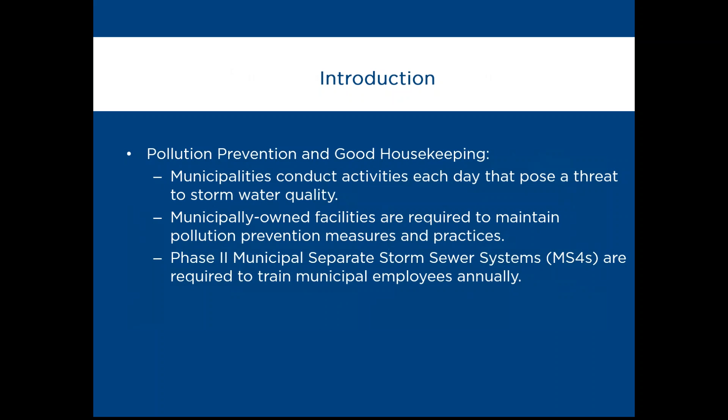Another reason is that municipally owned facilities are required by the MS4 program to maintain pollution prevention measures and practices. And lastly, as we've already mentioned, MS4s are required to train municipal employees on an annual basis to minimize adverse impacts to stormwater quality. So our first item here is salt storage and application.

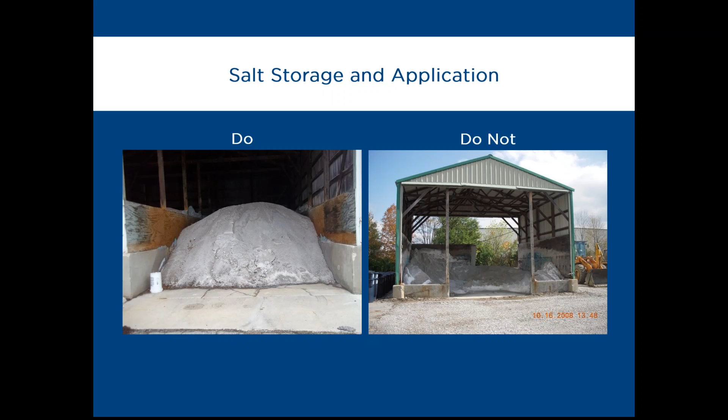Some proper management strategies for salt storage and application. Do store de-icing salt stockpiles in a covered structure. Push de-icing salt back into designated areas, as this prevents exposure to stormwater. And remember that salt should only be applied as needed to achieve the desired de-icing effect.

So if we take a look at this example here, we can see that the salt is located in a covered structure, that the salt is pushed back away from any openings, and that the salt is not exposed to stormwater. So this is a really good example of salt storage and application.

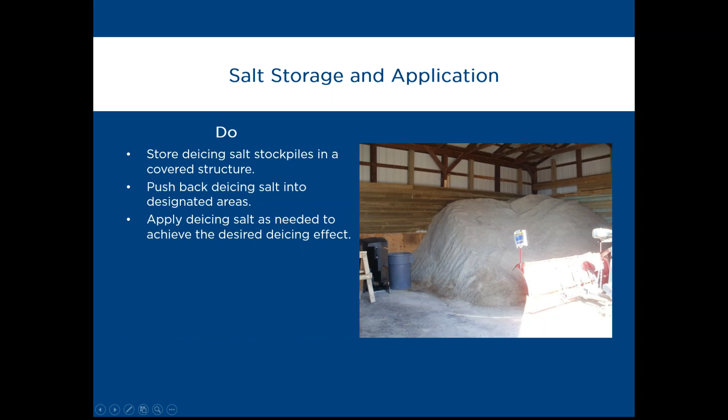Some things to avoid when managing de-icing salt stockpiles. Do not expose de-icing salts to stormwater. Examples of this could include uncovered storage areas and storing excess amounts of de-icing salts. Do not use water to clean up spilled de-icing salt; utilize dry methods only, as this prevents discharges to the stormwater conveyances. And lastly, do not over-apply de-icing salts. This reduces the potential for pollution in stormwater runoff.

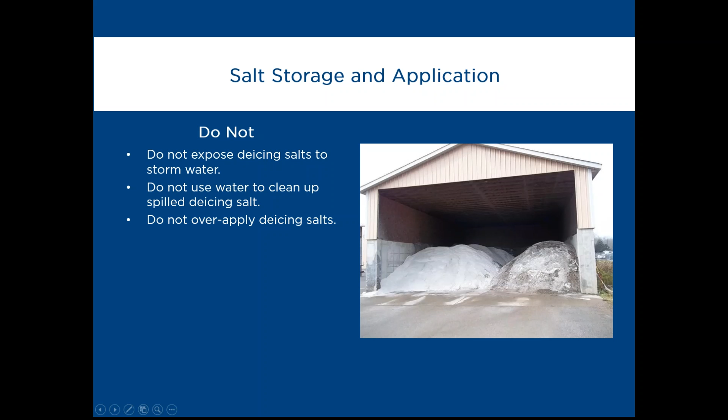If we take a look at the example provided here, we can see that although the stockpile is covered, it does not appear to be adequately sized to contain the amount of de-icing salt currently being stored here. We can actually see that the stockpile is overflowing the containment area and is being exposed to stormwater here and also over here. So this would not really be an ideal salt storage management practice.

Do stockpile materials within designated areas. Sweep up or push back stockpiled materials into designated areas to prevent exposure to stormwater. If applicable, use a vegetative buffer to prevent exposure to stormwater. And lastly, municipal wastes, such as street sweeping debris, should be stored under a covered structure and on a solid and sealed surface like concrete to prevent potential erosion and infiltration into the ground.

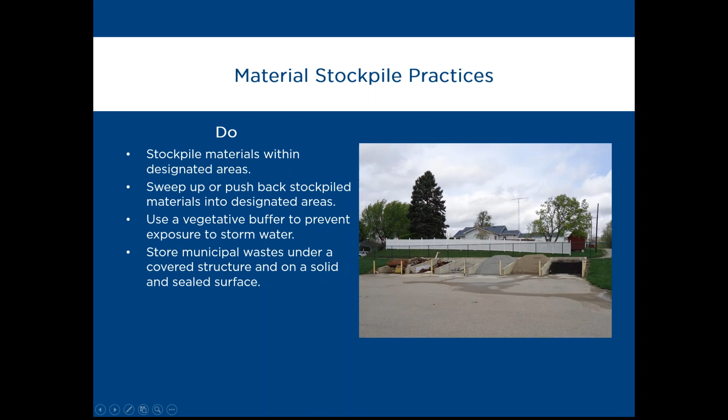Some items to avoid when managing material stockpiles. Do not store stockpiled materials adjacent to open storm sewer inlets or near water courses, flood zones, or other areas that may potentially damage water quality. Do not overstock stockpile areas. You want to properly size the stockpile containment areas. Excess materials may breach the containment structure, exposing those materials to erosion.

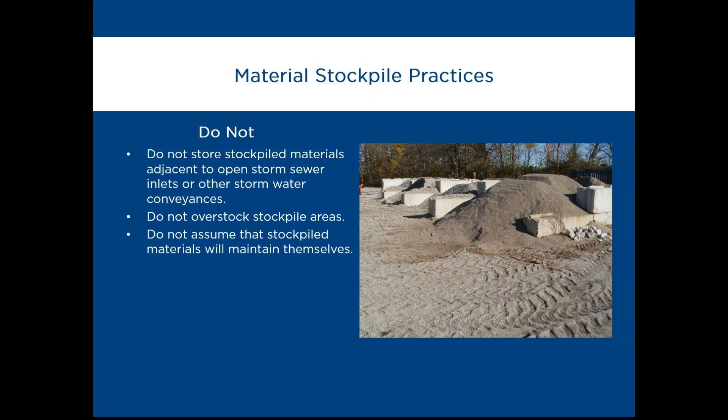Do utilize and store chemicals indoors where appropriate. Exposure to inclement weather may deteriorate containers, especially if they're metal. Keep chemical containers closed or sealed at all times unless in use. Place containers of in-use liquid chemicals on a spill pallet or provide other adequate secondary containment. Label all drums and containers according to the contents being stored, especially if they're used oils.

Used oil containers must be clearly marked as used oils, and the amount of used oil recycled should be recorded for your annual reporting. Lastly, routinely inspect chemical containers, especially those that are 55 gallons or larger, on a regular basis for leaks, spills, and other signs of deterioration.

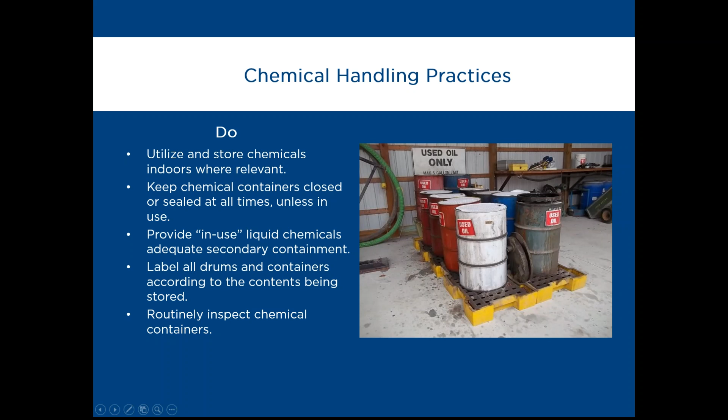So if we take a look at the example here, we can see that the containers are stored indoors, that the drums are sealed, and they actually have this absorbent mat on top here. The drums are labeled according to their contents, used oil, and secondary containment is provided. So this is a really good management practice here.

Some items to avoid. Do not store chemical containers near stormwater inlets or conveyances. Do not store chemical containers near building entrances. Spilled materials may escape the containment area and migrate to outdoor stormwater conveyances. And lastly, do not store containers directly on the ground. You want to elevate those containers to prevent any deterioration and corrosion, especially, again, if they're metal containers.

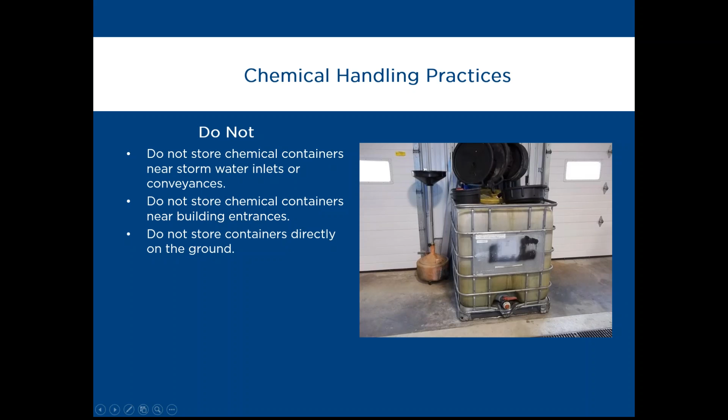Some additional proper management strategies for chemical handling. Recycle empty drums for reuse. Many of our MS4 communities reuse empty drums at parks and other recreational areas for trash containers. So if you do this, be sure to remove all labels and mark the drums as empty or trash. If you're storing drums outside, be sure to store them on their sides. This will allow precipitation to roll off the drums and not accumulate on the tops of lids or inside the drums. And be sure to stabilize those drums to prevent them from rolling.

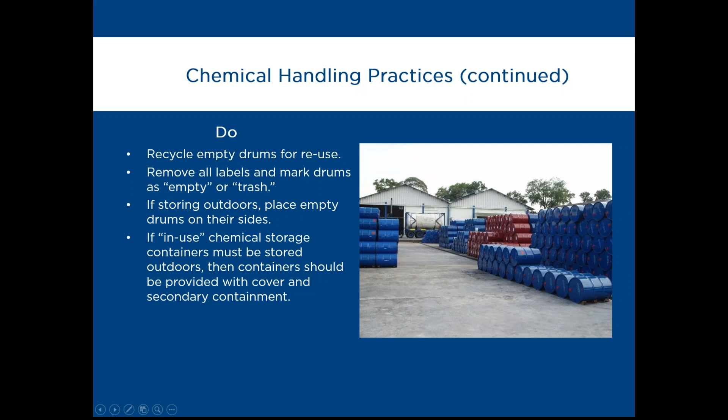Lastly, if in-use chemical storage containers must be stored outdoors, then the container should be provided with cover and secondary containment, as this prevents corrosion due to inclement weather. So if we take a look at the example here, we can see that the drums are empty, that they're stored on their sides, that the drums are secured to prevent rolling. You can see that here. And that the drums are labeled. It's a little bit harder to see, but they are labeled here. So this is a really good example of chemical handling practices.

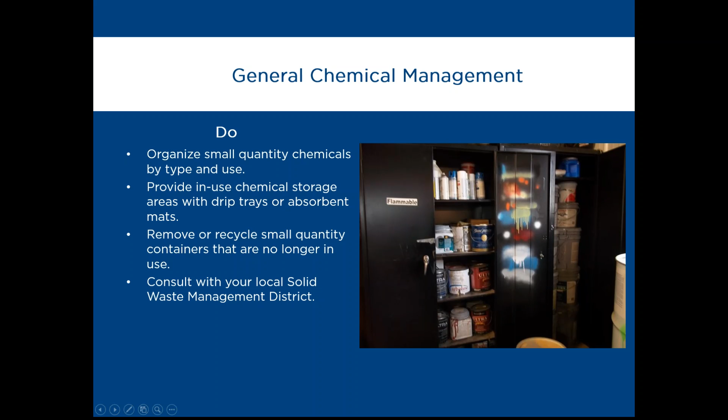So if we take a look at the example here, we can see that the chemicals are organized by type and use. And it's hard to see, but there are some drip pans provided here on each shelf, and the storage lockers are labeled. So here this is labeled as flammable. So this is a good example of general chemical management.

Some items to avoid when managing general chemical storage. Do not continue to store chemicals that are no longer in use. You want to utilize good housekeeping techniques at your storage areas. Do not dispose of unused small quantity containers, those are aerosols, paints, and oils, in ways that may be harmful to public health or the environment. Again, just consult with your local solid waste management district or waste removal contractor for proper disposal techniques. And lastly, do not accumulate large amounts of small quantity used oil containers. All oils generated from maintenance operations should be placed in a used oil container for recycling.

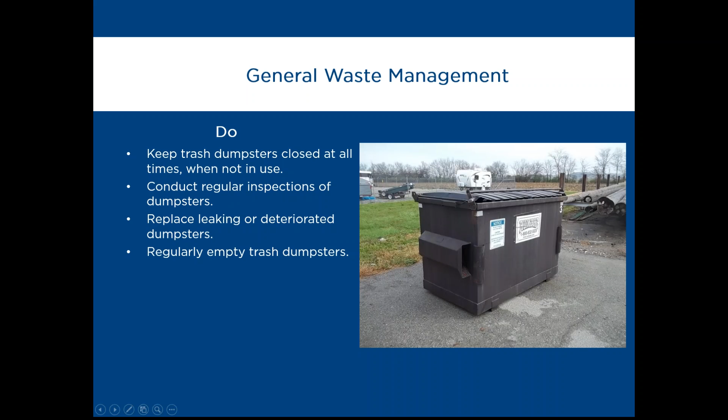And if we take a look at the example provided here, we can see that the dumpster, again, is closed, that there are no signs of leaks or deterioration, and it's not overfilled, and there's no signs of trash or other debris in the area. So this is a really good example of general waste management.

Some items to avoid. Do not store uncovered trash dumpsters outdoors. Trash containers stored outdoors should be kept in a covered container or dumpster. Do not overfill dumpsters. Wind and other adverse weather conditions may carry trash or other debris to stormwater conveyances. Do not place uncovered dumpsters near storm drains. Contaminants may leak from dumpsters and migrate to stormwater conveyances.

So let's take a look at the example here. We can see that this roll-off dumpster is not covered. It's beginning to show signs of deterioration. You can see that here with all this rust. And there is some trash and debris in the area. So this is not an ideal general waste management practice.

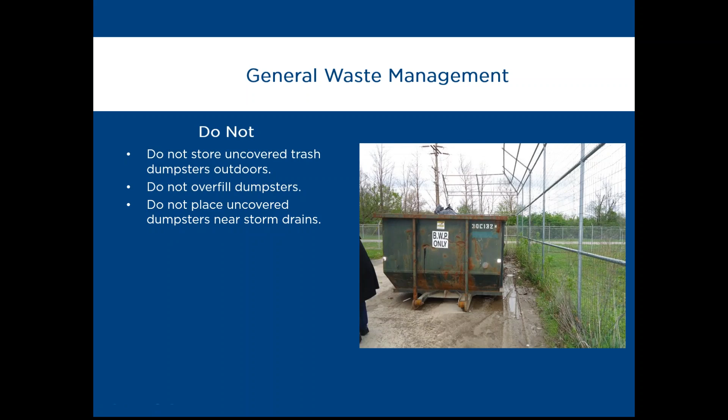Well, let's take a closer look at some of the proper management strategies for fueling operations. So do provide secondary containment for all bulk fuel containers, those that are 55 gallons or larger. Acceptable secondary containment consists of a containment structure capable of capturing a spill of the largest container within that containment unit. Label tanks according to their contents.

Inspect accumulated rainwater in secondary containment units. If there are signs of contamination, the water must be pumped out and disposed of properly. Ensure spill kits are located in an easily accessible location near the fueling area and chemical handling areas. And lastly, when possible, consider covering containment areas and fuel transfer areas, as this prevents contact with stormwater.

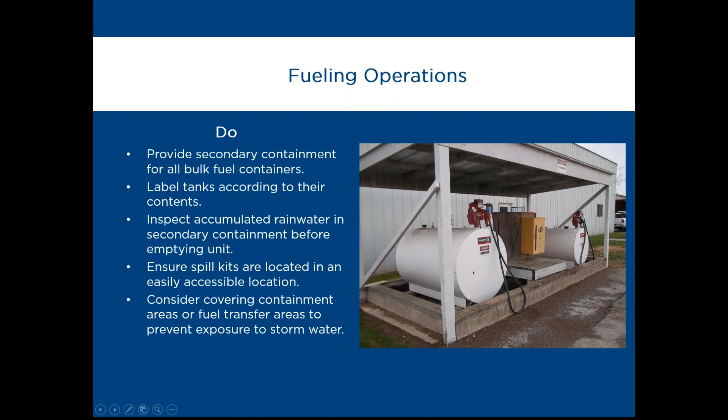So if we take a look at our example here, we can see that there is adequate secondary containment. There's a spill kit located in the fueling area, and the secondary containment unit is covered. So this is a really good example of fueling operations.

Some items to avoid: do not store bulk fuel tanks in direct contact with the ground. Tanks should be elevated to prevent exposure to moisture, which may cause corrosion, especially in metal tanks. Do not store bulk fuel containers on crushed stone or grass. Containers should be stored on a concrete pad to prevent spills and drips from infiltrating into the ground and contaminating soil and the groundwater. And lastly, do not neglect outdoor containers. Ensure that tanks are not accumulating rust, that correct labels are in place, and that equipment is functioning properly.

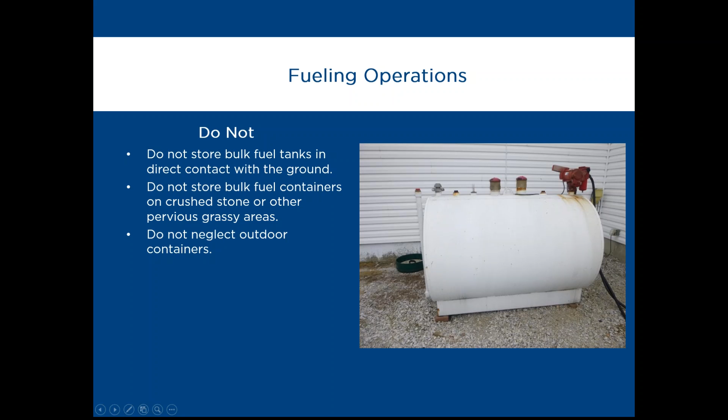Some additional management strategies for fueling operations: do provide fueling tanks with some form of protective structure, barrier, or curbing to prevent damage to the tanks. These can be in the form of safety bollards or other protective structures. Turn off your vehicle during fueling operations. Apply absorbent materials to fuel spills immediately using the nearby materials from the spill kit. And during bulk fuel transfers, department personnel should ensure that the driver is present throughout the entire unloading procedure to monitor fuel transfers and detect potential leaks and spills.

So if we take a look at this example of a fueling area, we see a few things. The fuel transfer area is covered, there are safety bollards in place, and it's hard to see, but there is a spill kit right here. So this is a good example, again, of a fueling operation.

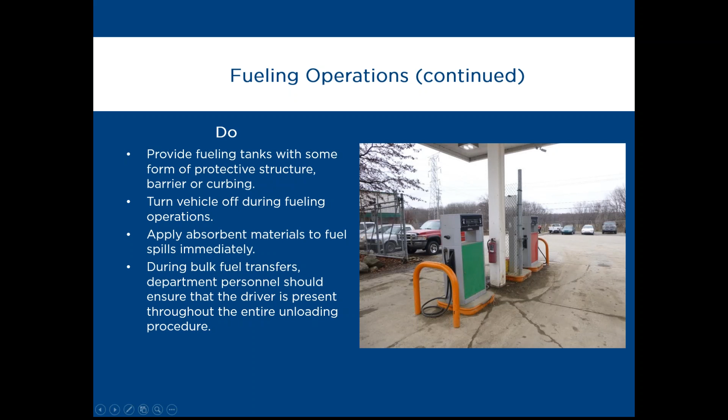Some items to avoid: do not fill a fuel can that is located inside a vehicle or in the bed of a truck. Place the fuel can or equipment on the ground before filling. Remember, the can is not grounded from electrical charge if it's still inside the vehicle. Do not smoke or re-enter your vehicle during fueling. Static electricity can build and cause a fire.

Do not leave the vehicle during fueling. Do not attempt to top off the tank, as overfilling can cause spills. And lastly, do not rinse spilled fluids to nearby inlets or stormwater conveyances. Be sure to use absorbent materials to collect the spilled fluids.

So I included this example here because the fueling area is equipped with a stormwater inlet. The tank is double-walled here, but any leaks or drips or spills that may occur during the actual fueling transfer have the potential to flow to this inlet. Also, having a drain right next to the fueling area may make it a bit more tempting to rinse spilled fluids into that drain. So while this is a nice concrete pad, secondary containment, this is not an ideal fueling operation.

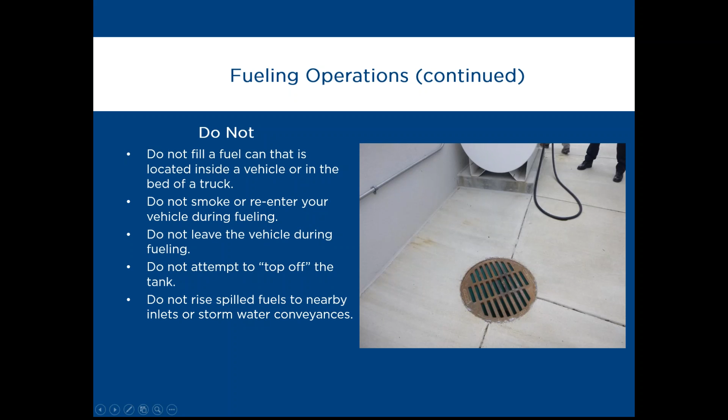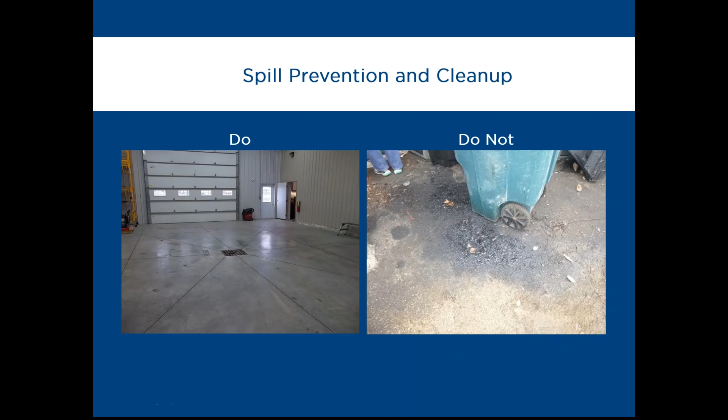So the next item is spill prevention and cleanup. And again, here are two examples from two different MS4 communities. In the first photo, we can see that the floor is clean and free of drips, spills, and other debris. However, in the other photo, there's an obvious oil spill. There are no absorbent materials applied to this, and the spilled material really should be cleaned up and the contaminated soil removed. Let's take a look at some proper management strategies for spill prevention and cleanup.

Do clean up spilled fluids immediately using oil dry or other absorbent materials. Remove yourself from harm and contact your department supervisor in the event of a significant leak or spill. Refer to safety data sheets for chemical properties and handling information. Place absorbent materials or a spill barrier around spilled material to prevent the flow of materials to a floor drain and to absorb the chemical. And lastly, cease cleanup operations and contact outside assistance if the spill becomes hazardous to employees.

So if we take a look at the example provided here, we can see that absorbent material has been applied to a spilled chemical. The absorbent material should be swept up properly. Do not allow the absorbent material to set for an extended period of time.

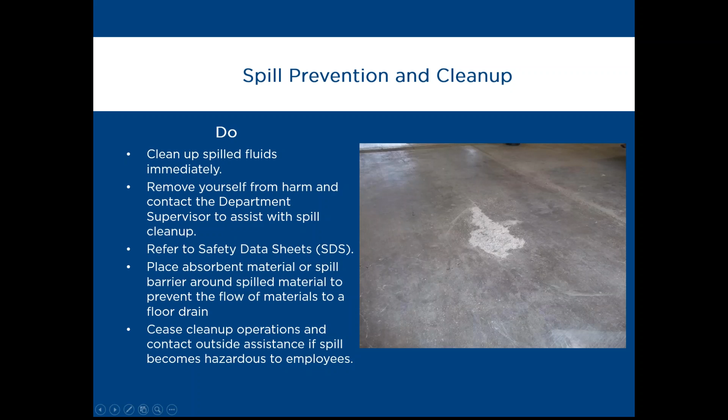Some items to avoid: do not allow spills to flow off-site. Spilled chemicals must not be allowed to infiltrate into the ground or enter a storm drain, swale, or other waterway. Do not hose spilled materials down with water. If water is used to clean up a spill, it must be collected and disposed of properly.

Granular absorbent should not be routinely spread on the ground or in secondary containment units. Absorbent material that is allowed to remain on the floor can be scattered and carried outside on vehicle and equipment tires or on the bottoms of shoes. The materials should really be swept up as soon as possible.

So if we take a look at our photo here, it's a little bit hard to see, but absorbent material has been applied to an oil spill here, but it's just been left. The absorbent material is obviously saturated, and it should be removed immediately. Absorbent material should be swept up promptly and not allowed to sit for an extended period of time. Anywhere between 20 and 30 minutes after the application, and certainly under an hour.

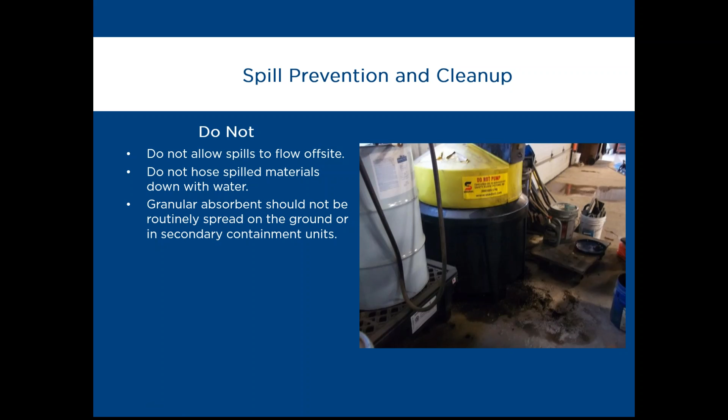Some additional spill prevention and cleanup management practices. Do position spill kits and spill absorbent materials in close proximity to fueling areas and chemical storage areas. Clearly label all spill kit containers and materials, and train all employees on how to properly use materials in the spill kits. So here in the example provided, we can see that the spill kit is properly stocked, and it is located next to a chemical storage area.

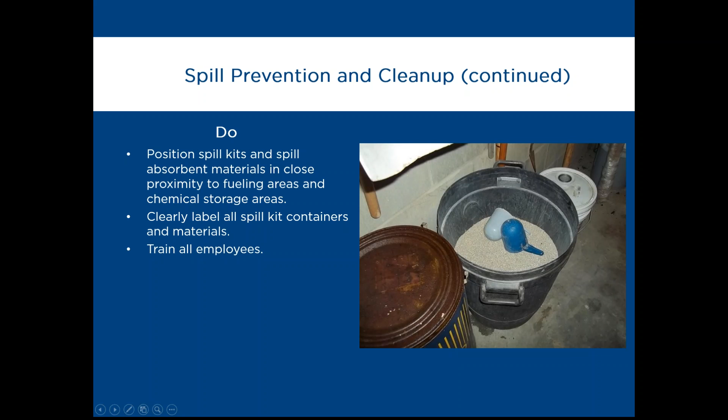Some items to avoid here: do not neglect spill kits. Restock the spill kit with absorbent materials after use. Do not place used materials back into the spill kit, and used spill absorbent materials should be properly disposed of. And lastly, do not expose the spill absorbent materials to inclement weather. The spill kits should be sealed in a waterproof container.

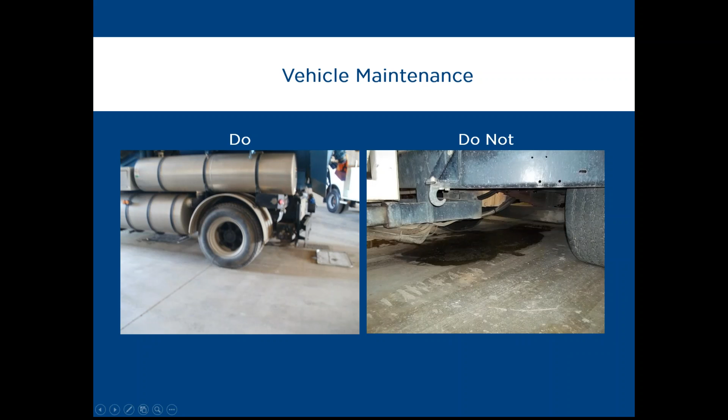Really, absorbent materials should be applied to that spill and swept up immediately, and then maintenance performed on both pieces of equipment. But let's take a look at some proper management strategies. Do conduct vehicle maintenance indoors where floor drains are not connected to the stormwater system. Check vehicles and equipment routinely for leaks and spills, and repair as required.

Drip pans and absorbent spill mats should be temporarily placed under vehicles and equipment until those repairs can be completed. Transfer accumulated materials in the drip pans to a designated used oil container as soon as possible. And store used oil filters, batteries, antifreeze, and the like in separate designated areas until properly disposed of or recycled.

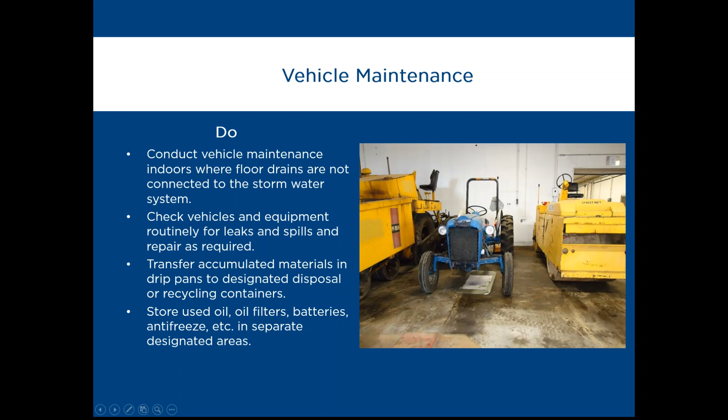So here we can see in the example provided that we've got a leaking piece of equipment, and the equipment is provided with a drip pan and absorbent mat. So this is a good management practice here. Some items to avoid: do not store leaky equipment and vehicles over interior floor drains. Spilled oils and other harmful chemicals may flow to the storm, sanitary, or combined sewer systems.

Do not store leaky equipment or vehicles outdoors. Spilled oils and other harmful chemicals should not be allowed to infiltrate into the ground. And lastly, do not allow spill absorbent materials to remain on the floor for an extended period of time. The remaining absorbent material can be scattered and carried outside to stormwater conveyances, or it may even become a slip hazard.

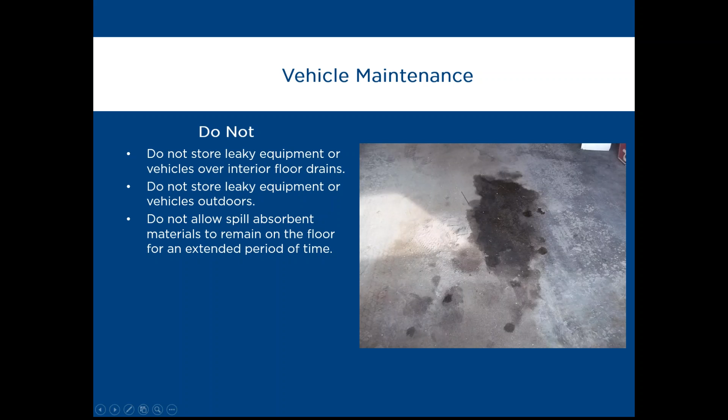Some additional proper management strategies for vehicle maintenance. Do conduct vehicle and equipment washing indoors where interior floor drains do not flow to the stormwater system. If washing activities cannot be conducted indoors, select a well-vegetated, flat location away from any stormwater conveyances to conduct washing activities. Use a trigger hose or bucket to conserve water.

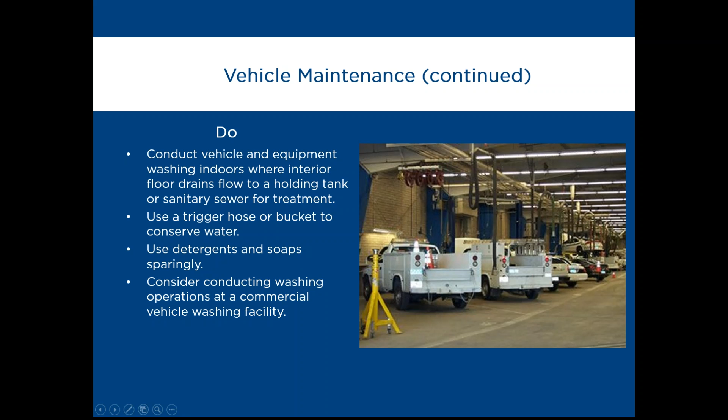Use detergents and soaps sparingly. If possible, only use plain water and a coarse sponge. And lastly, consider conducting washing operations at a commercial vehicle washing facility. If we take a closer look at the example here, we can see that all vehicle maintenance and washing is being conducted indoors and that the drains are connected to the sanitary sewer for treatment. So this is a good example of vehicle maintenance management strategies.

Again, some items to avoid when managing vehicle maintenance areas. Do not allow vehicle and equipment wash waters to drain to stormwater inlets and other stormwater conveyances, swales, streams, ditches, and the like. Do not store excessively dirty vehicles or open box bed equipment, by that I mean dump trucks, de-icing salt spreaders, and the like, outdoors without cover.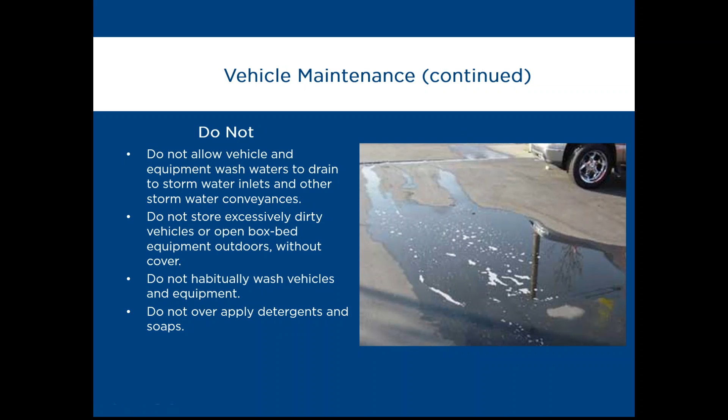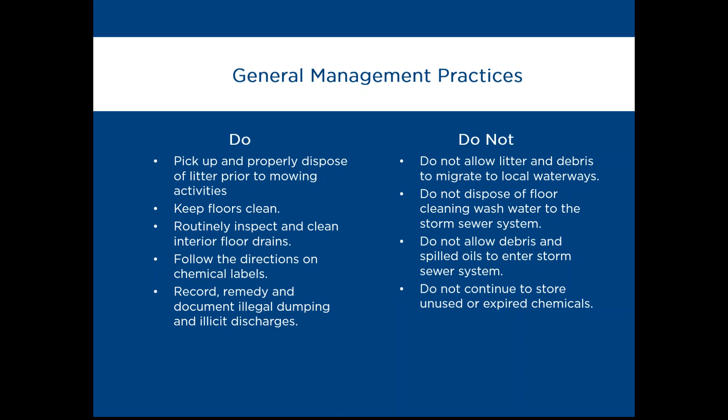So in conclusion, it's important to remember that MS4 communities are required to document municipal employee training on an annual basis. This webinar will be available on our website for future municipal employee training needs. So don't forget to download the training sign-in sheet and agenda, and be sure to save a copy for your records.